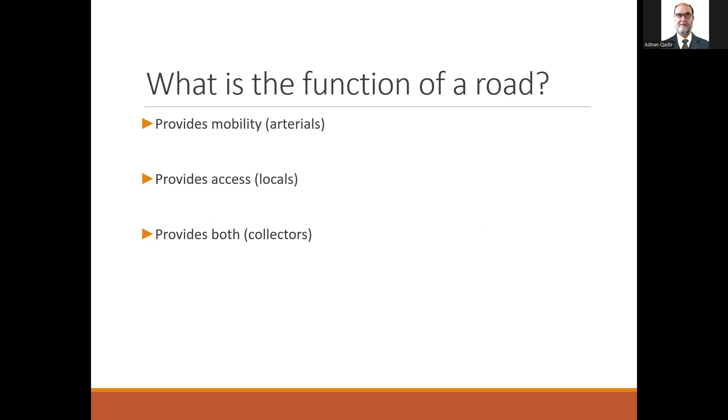Why we need to know is to help determine which level of government has this responsibility. Obviously, the higher classification will have higher design parameters like speed, width, geometry, curve design. And then if you have a higher classification, then obviously the fund sources and the funds are different.

And it's always the classification that helps getting federal aid or, in our scenario, international aid like ADB, the Asian Development Bank, or the World Bank.

There are some other classifications of the road other than access and mobility. We call this an all-weather road or fair-weather road. We can say whether it is a paved road or unpaved road, or in our local term, we call this a kacha road, the unpaved road. Then, depending upon the pavement surface, whether it's a surfaced road or unsurfaced road, that's also a way of differentiating the highway.

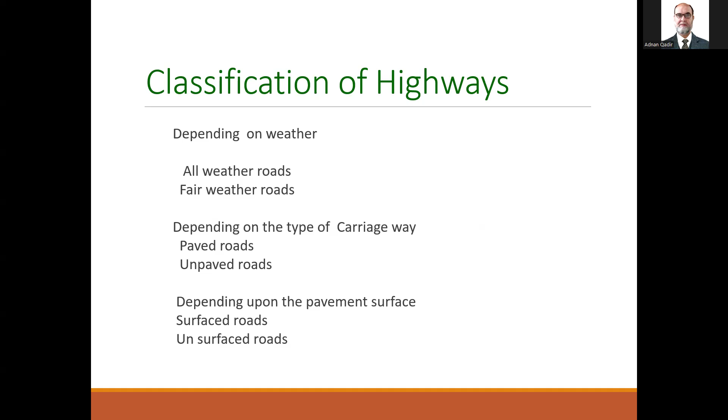Another classification is based on the traffic volume: heavy, medium, and light. Some say this is class 1, class 2, class A, B, C, and so on. How much load carrying capacity, meaning tons per axle, is allowed per day. Usually 8 tons or 12 tons in our part of the world.

Then we also classify based on authority, like NHA, National Highway Authority, Provincial Highway, Major District Road, other district road, and the farm to market road, what we call a rural road.

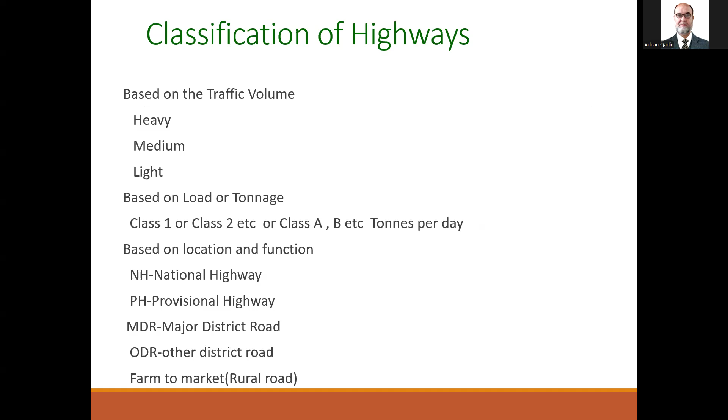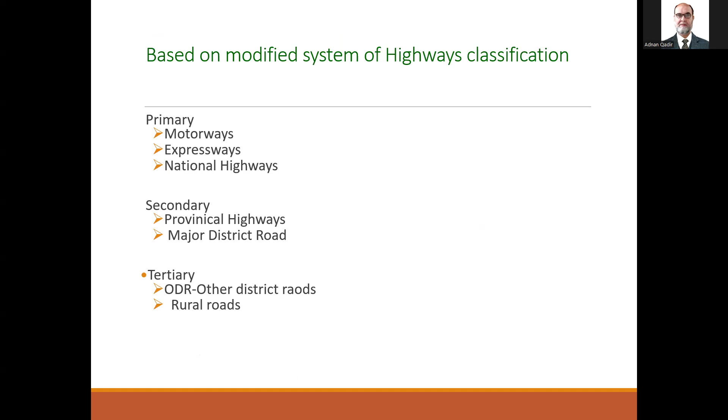We have another way of classification: primary, secondary, and tertiary. Primary means motorways, expressways, and national highways. Secondary means provincial highways and major district roads. And tertiary means other district roads or rural roads.

So let's define what is a motorway. Controlled access highways provide an unhindered flow of traffic with no traffic signals, intersections, or property access. They are free of any at-grade crossings with other roads, railways or pedestrian paths, which are instead carried by overpasses and underpasses.

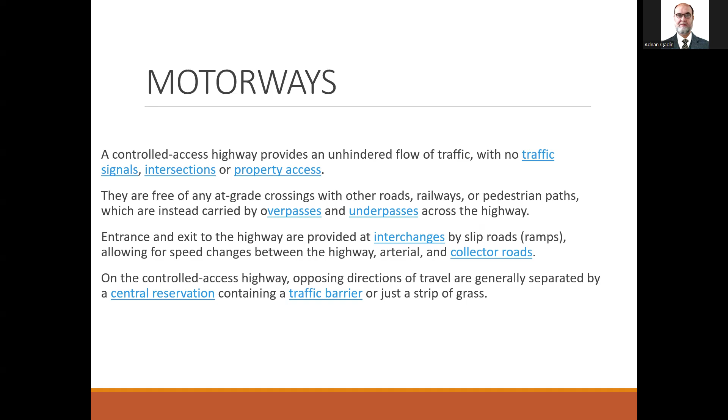Entrance and exit to the highway are provided at interchanges by slip road ramps, allowing for speed changes between highway, arterial, and collector. On the controlled access highway, opposite directions are generally separated by a central reservation containing a traffic barrier or just a strip of grass. It can be elevated, it can be depressed, or it can be of any other form as well.

Then there are expressways: high speed, 120 kilometers per hour, having a land width of 90 meters, full access control, connecting major points of traffic generation, no slow moving traffic; tolling may or may not be allowed. Some people say an expressway connects two parts of the same city, while motorways connect two cities, or it's an intracity highway. Other than this, most of the time, expressway has the same meaning as motorway.

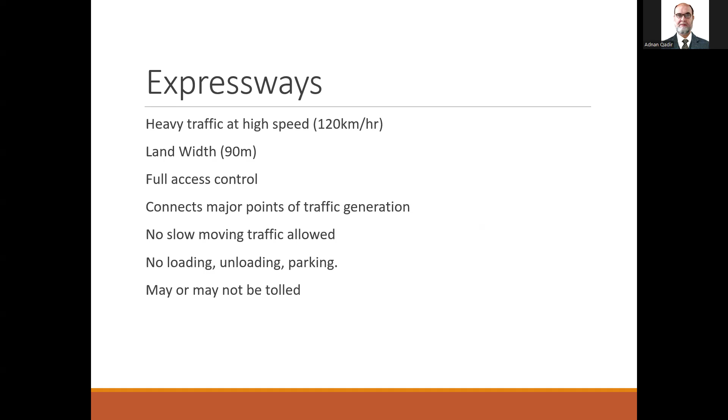Now, the provincial highways are the arterial roads of the province, connecting with national highways, district headquarters, and important cities within the province. Major district roads are important roads within a district serving areas of production and markets, connecting those with each other or with the major highways.

When we say other district road, we mean roads serving rural areas of production and providing them with the outlet to market centers or other important roads like major district roads or provincial highways. The roads between the cities are known as rural roads. They can be connecting villages or groups of villages, or the nearest road of higher category like district road, other district road, or major district road.

A very important concept of defining highway classification is functional classification. It is just a guide and it is practiced by different countries. Their boundaries are not rigid and some develop supplemental criteria as well.

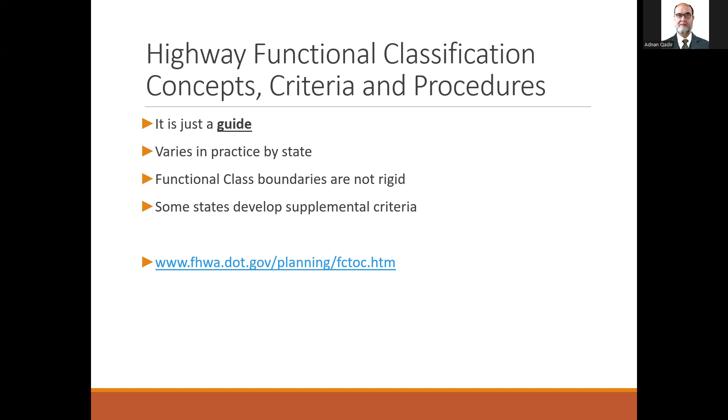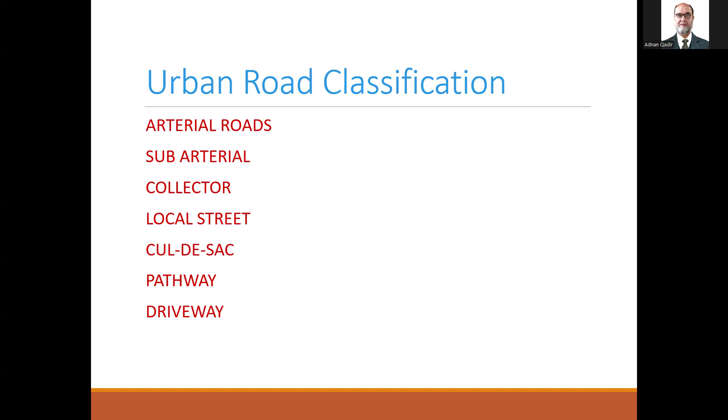Urban roads can be an arterial road, the sub-arterial, the collector, the local street, the cul-de-sac, pathways, and the driveway. Group population centers and major travel generators, identify neighboring centers, connect the largest directly, and connect the next group to the major centers.

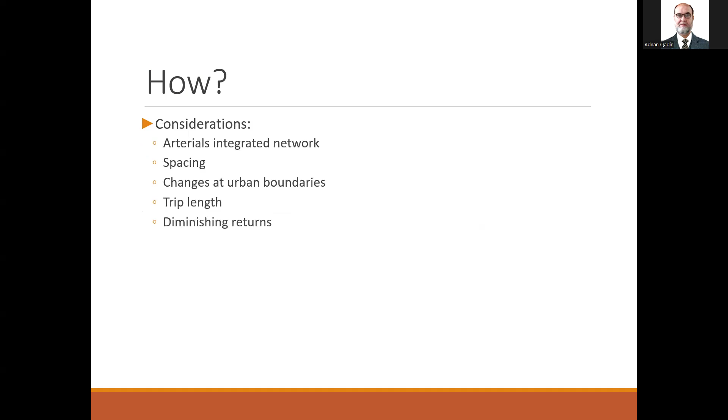The considerations are the arterial integrated network, spacing, changes at urban boundaries, the trip length, and the diminishing returns. When we talk about urban boundary, we mean urban clusters. This is based on the census, and it's a secondary criteria. Urban places are the political boundaries, and then there are adjusted boundaries.

Design considerations of these types of highways are derived from the Policy on Geometric Design of Highways and Streets, 2018. It's a very well-known standard book of reference, and the latest edition is 2018. People call it the Green Book because typically its outside cover is green. Some people in the US call it the Bible of geometric design of highways as well.

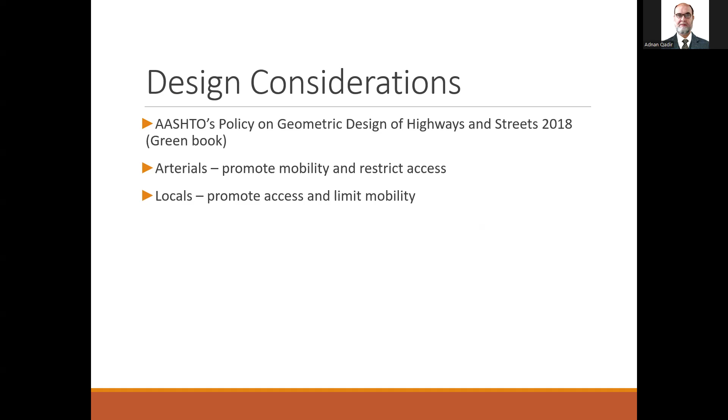Then there are arterials that provide mobility and restrict access. And then they define local. Actually, the Green Book defines arterials as promoting mobility and restricting access, while locals promote access and limit mobility. The design features are the speed, the posted speed or design speed, what level of service, A, B, C, D, E. Remember, F is failure. Then the alignment, the width, the clearances, and the grades.

This is one way of an urban arterial. This diagram shows the mix of arterial, subarterial, collector, local, cul-de-sac, pathway, and driveway. So if you look at this diagram, this connects two cities, so it can be connected directly by the help of bridges or an expressway, or it can be connected along its perimeter. And you can see this maroon line. These are all the major arterials. So arterials pass along the periphery of the city, as well as connecting directly to the city. Again, this is a form of an expressway.

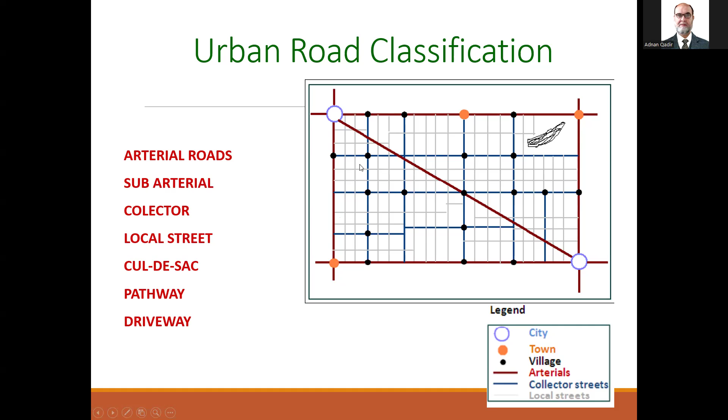Then between these two cities, there are a lot of villages. And this blue line, they are all collector streets, collecting traffic from arterials and distributing it to the villages, and the light green-gray is local streets. So a local street can be connected to the arterial, but most of the time the locals are connected to a collector, and then the collector distributes to the arterial. There are some roads that we call cul-de-sac roads.

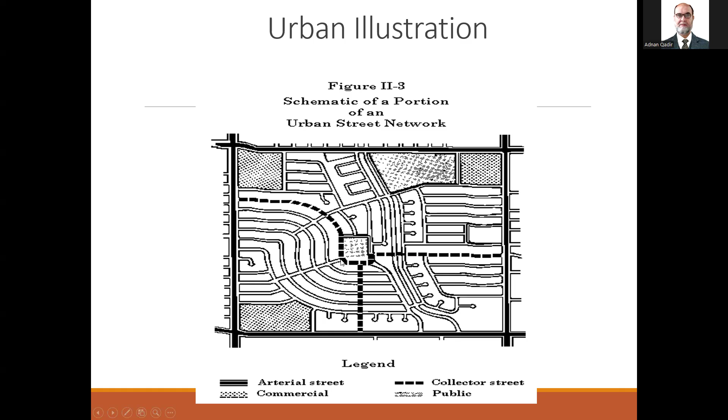This is another example of a street plan. As you can see, along the perimeter there is an arterial, and within the city there is a commercial setup, and this commercial setup is connected by local roads, and between local roads there are collector roads. So, for example, if I am in this shopping area and I want to go to the arterial, I will take one of these routes, then connect to the collector, and this collector will connect me to the main arterial street. Or it can be vice versa: from the collector I will take the local road and go to my desired place.

Most of the time, federal aid means the finances from the federal government. They are given to the National Highway System for developing and maintaining the principal arterials. And then the Surface Transportation Program covers arterials, urban collectors, or rural major collectors. People are often confused about rural roads. Rural roads are those roads that connect cities. Any road that connects two cities is a rural road. Rural doesn't mean it is in the village, though a rural road may connect to villages as well. And obviously there can be rural major collectors.

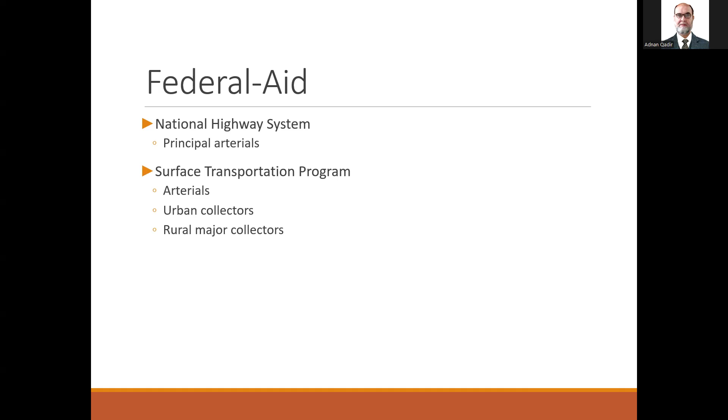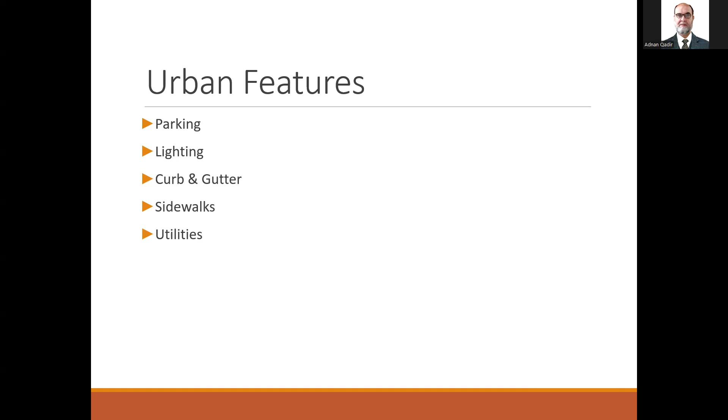The urban features of our road: we have to know the parking space. There should be lighting. There should be curb and gutter to take care of rainwater. And then there are sidewalks, and there are utilities like places for electricity, gas pipelines, or optical fibers, to name a few, or telephone lines as well. Optical fibers are for internet connection. For designing, there are environmental factors like rain, snow, haze, fog, and then there's the traffic load and a temperature load as well.

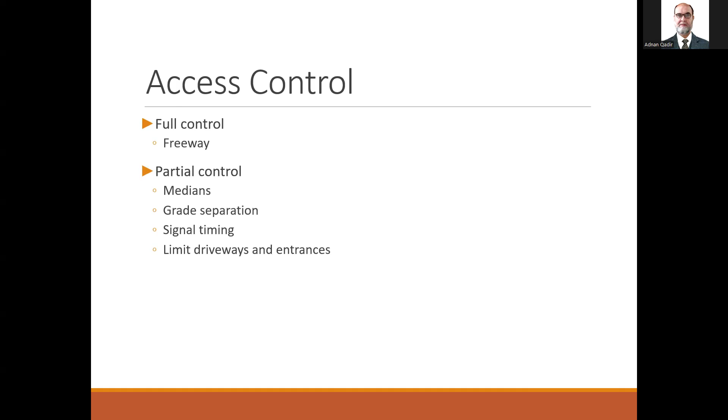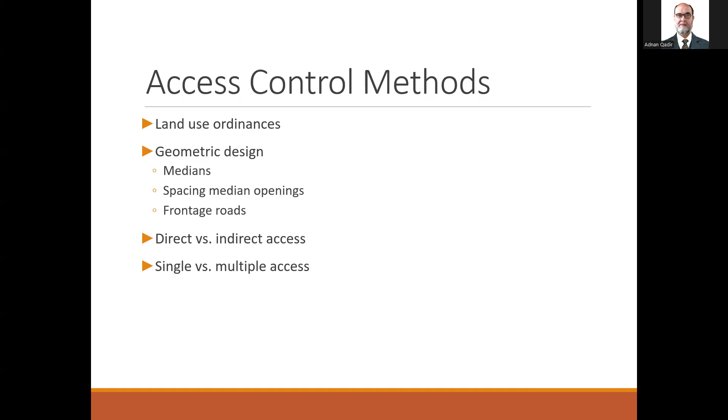On a freeway or a motorway, there is full control. And when we say partial control, there are medians, grade separation, signal timing, and limited driveways and entries. We can control access to major motorways or expressways through land use ordinances, geometric design, direct versus indirect access, and single versus multiple access.

Similarly, if I am coming from some other place, from the city, as I go to my home, my land accessibility increases. As gradually I travel toward the center or the city center, I will have to reduce the speed. There will be more friction, and at some point I will reach my destination.

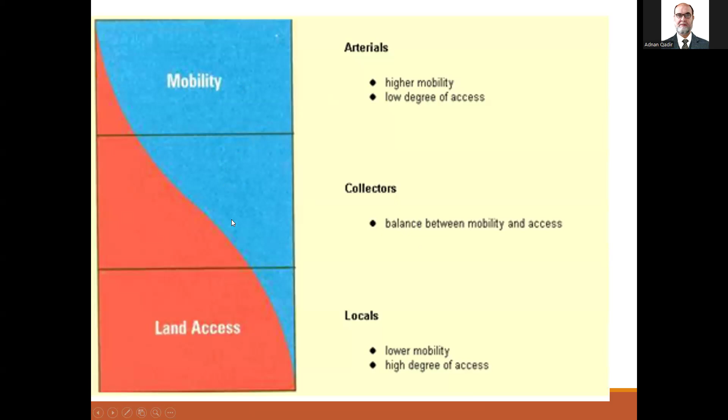So again, this box is high mobility, low degree of access. You cannot enter this arterial. And collector is a balance between the blue and red. It's just a balance between mobility and access. And as the land access increases, there is lower mobility and a higher degree of access.

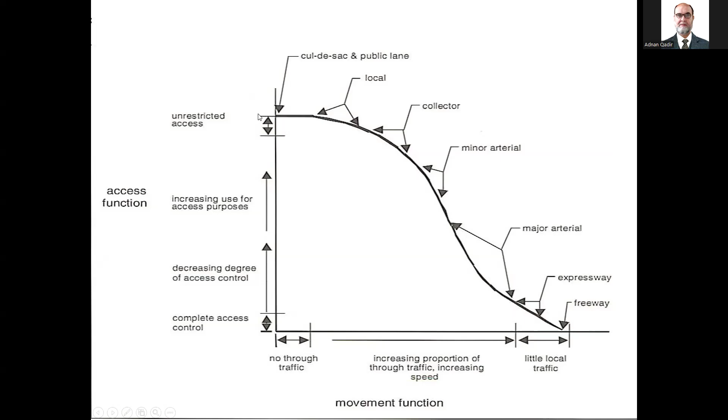Then at this point, this is local. And you can see that the mobility is increasing, right? Movement function is increasing from this point to this point. Traffic is increasing, speed is getting higher. There is a minor arterial, then major arterial, then expressway, freeway, motorway. This is access function. Access function is increasing as we go to the closer road, and it is decreasing as we go towards mobility.

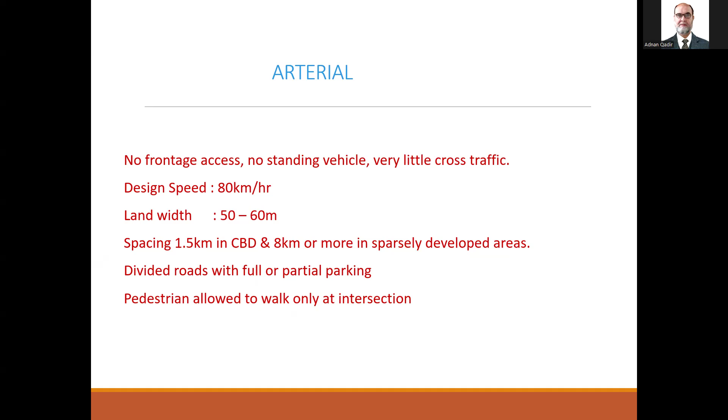So in arterial, there is no access. No vehicles are allowed to stand on it. There is very little cross traffic. Usually the speed is 80 kilometers per hour. The land width we need is around 60 meters. The spacing is 1.5 kilometers in the central business area and 8 kilometers in sparsely developed areas. They are divided roads with full or partial parking. Pedestrians are allowed to cross only at intersections, not at the mid block.

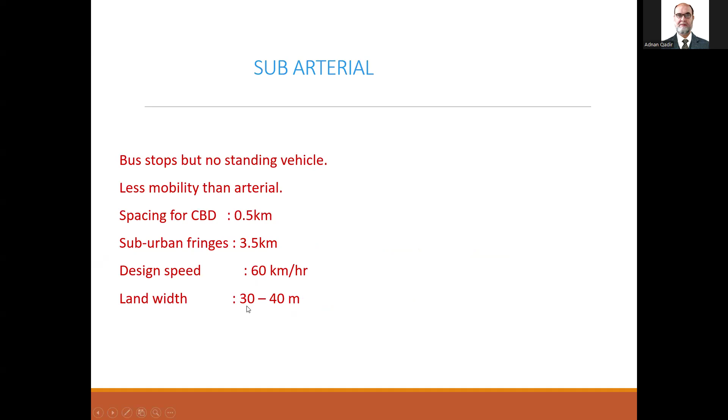Sub-arterials: no standing vehicles, less mobility, spacing 0.5 kilometers to 3.5 kilometers in urban fringes, speed 60 kilometers per hour, and the width is around 30 to 40 meters.

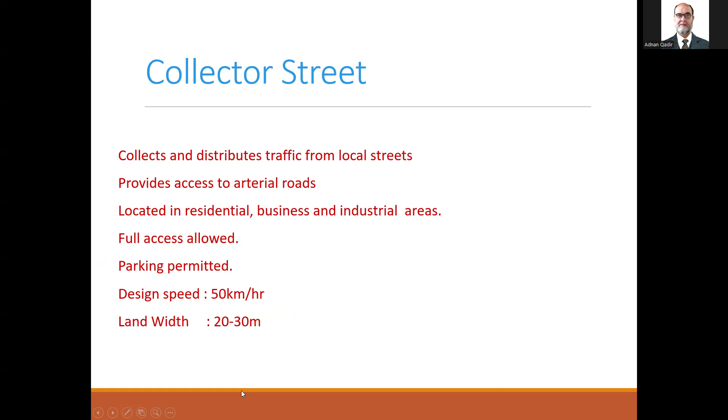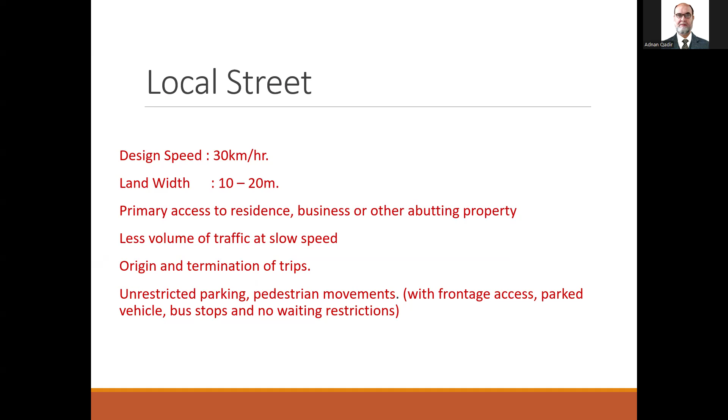The local street has a design speed of 30 kilometers per hour, land width of 10 to 20 meters. It is the primary access to residences, less volume, origin and termination of trips, unrestricted parking, pedestrian movement, bus stops, and no waiting restrictions. There is the cul-de-sac. It's a dead street with only one entry access, recommended in residential areas.

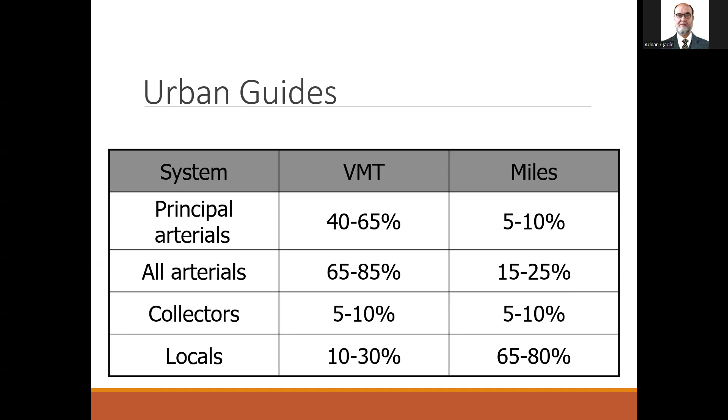What is the AASHTO guide for a locality, in a perfect urban setting? VMT is vehicle miles traveled. So 40 to 65% vehicle travel, and 5 to 10% miles, the length of the road. Then all arterials 65 to 85, 15 to 25%. Collector 5 to 10%, and the locals 10 to 30%. And then the mileage is around 65 to 80%.

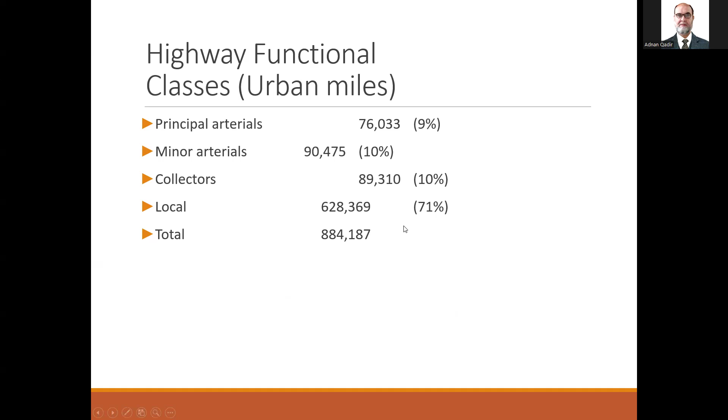In a classic example of US highways, principal arterial is a 9% share in the total road network, minor arterial 10%, collector 10%, and 70% are local. So in any typical setup, the arterials are less while the locals are more. So you can say around 20% or 30% arterial and collector, and 70% local. It's a very good way of knowing how to plan your cities.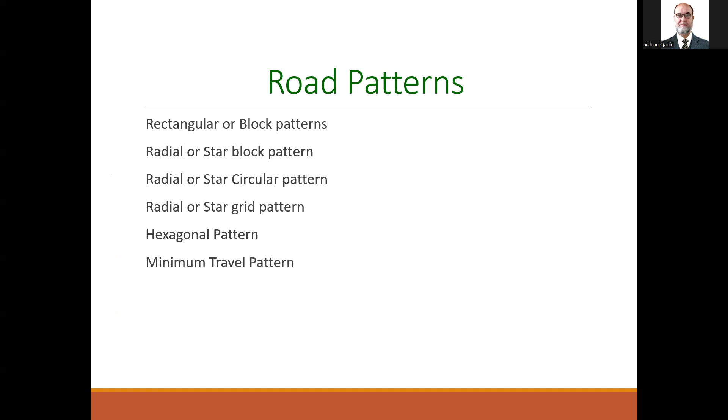The road pattern is also important while planning a city. There can be a rectangular or block pattern, radial pattern, circular pattern, radial or star grid pattern, hexagonal pattern, and minimum travel pattern. So that's all about the highway classification.